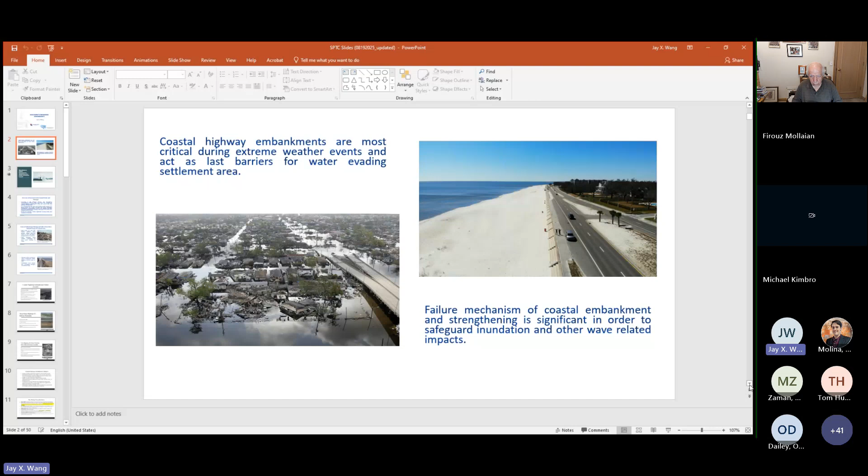Yes, correct. So we have to design a highway embankment against the hydrodynamic forces, erosion, and a lot of things, as we can see here. Wave forces are the first impact to consider when you design an embankment. So how does the highway embankment in coastal areas fail, what is the failure mechanism?

At the very beginning, I'd like to present some cases, and from these cases we can summarize some lessons.

NOAA, everybody familiar with NOAA? We get incomplete data, probably not so incomplete. We recently checked online and found from 1980 to 2018, almost 40 years, there are 233 disaster cases. NOAA has statistics showing a total of 23 weather climate disasters where each case's loss is more than $1 billion per event. We also gathered some FEMA data. Since April 30th, 2018, the total cost for FEMA recorded disaster cases exceeds $1.5 trillion. And since 1978, the total cost is $57 billion for 118 significant flooding events.

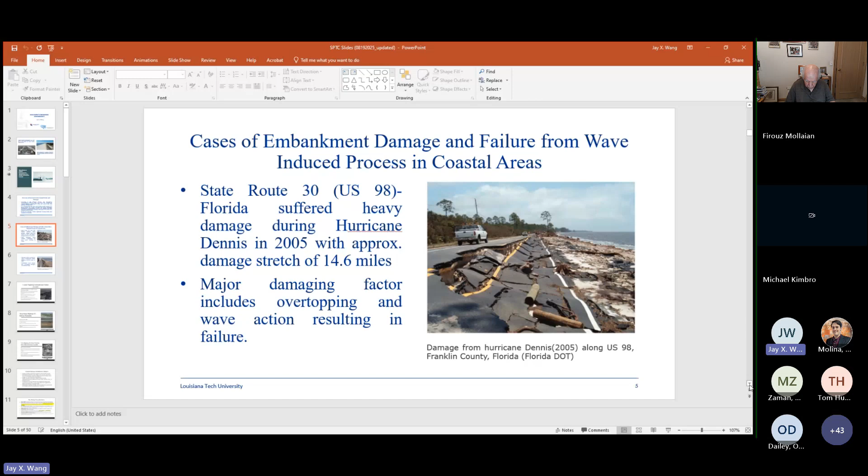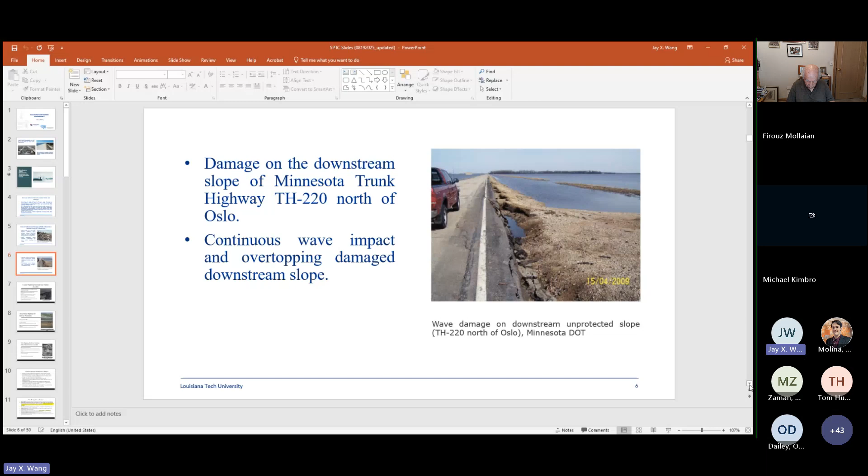Another lesson we can learn is from the Minnesota trunk highway TH220, north of Oslo. Same reason, hurricane came over and wave overtopping happened. But this time it's not upstream damage, we get lots of damage on the downstream slope. So you can see once overtopping happens, downstream gets lots of damage because of erosion. So it happened at the downstream stage.

This is the Louisiana State Highway 82, which was damaged during Tropical Storm Chris in 1982, and Hurricane Chantal and Jerry in 1989. We get a wave impact, we get wave overtopping, and at the toe of the embankment we get soil scouring. So hydrostatic pressure-induced slope stability is another issue we have to pay attention to. The Gulf side lane was destroyed in multiple storms on State Highway 82.

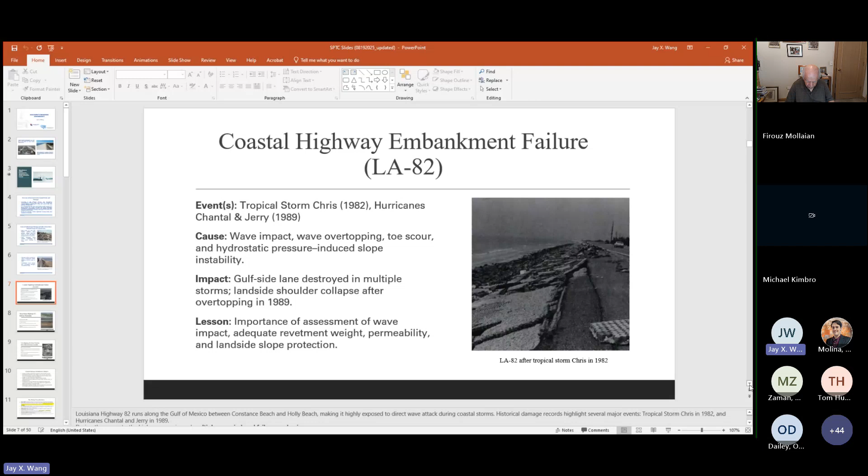So lessons we learned from this highway damage on State Highway 82: the important lesson is wave impact, and we should design and construct adequate revetment weights, and also consider the permeability issue. On the land side we also have to protect the slope. Common sense tells us to pay special attention to the upstream, seaside, but on the land side slope we have to pay attention to how to protect the landside slope.

This is Texas State Highway 87, Bolivar Peninsula, a famous peninsula most of you know. With Hurricane Ike in 2008, a storm surge occurred, and the wave impact eroded the embankment and completely washed away the roadway. This is a very serious disaster. Many sections of this highway were washed away, resulting in long-term closure of the road.

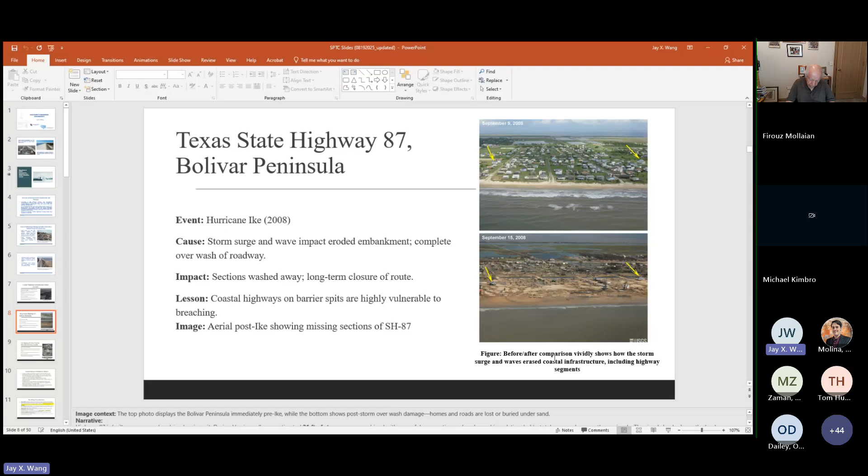What are the lessons we can learn from this disaster? Coastal highways on barrier spits are highly vulnerable to breaching. This is the aerial image you can see. Very similar things we can find from these different disasters.

This is probably the last one I'd like to share. There are thousands of disaster examples like this, but here I just want to draw your attention to how important it is to design the coastal highway. This is the last one: this happened a long time ago, US Highway 90 in Mississippi.

We get more than 20 feet of storm surge combined with powerful breaking wave impacts that also overtopped the seawall. So the seawall is strong, but not strong enough for this. And after going over the seawall, very severe scouring happened. The impact is pavement collapse and disrupting travel lanes on this critical coastal highway.

The lessons we learned are almost the same thing. And here, even with the seawall overtopped, and even though this is a well-armored shoreline, it was still not safe in the end.

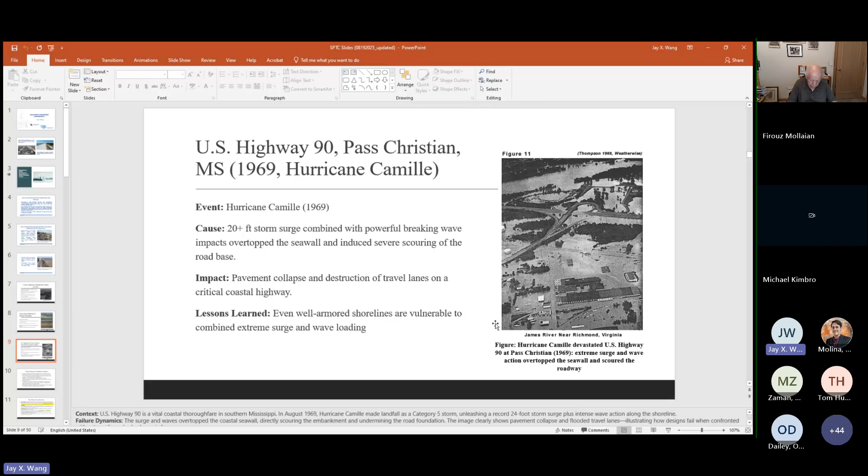From all these lessons, we can see how to design a coastal highway embankment. We have different ways to design a highway, but all these different ways have to pay attention to withstanding wave action, storm surge, and erosion. This is a typical serious problem we have to pay attention to.

The coastal highway is usually built on soft clay, soft beach sand, very loose beach sand. So site investigation and site reconnaissance are also very serious. CPT and SPT site investigations have to be performed to get exact soil data before we do design and construction.

In relation to our research, I have to highlight wave action, sea level rise, and potential erosion. This is a typical serious problem we have to pay special attention to.

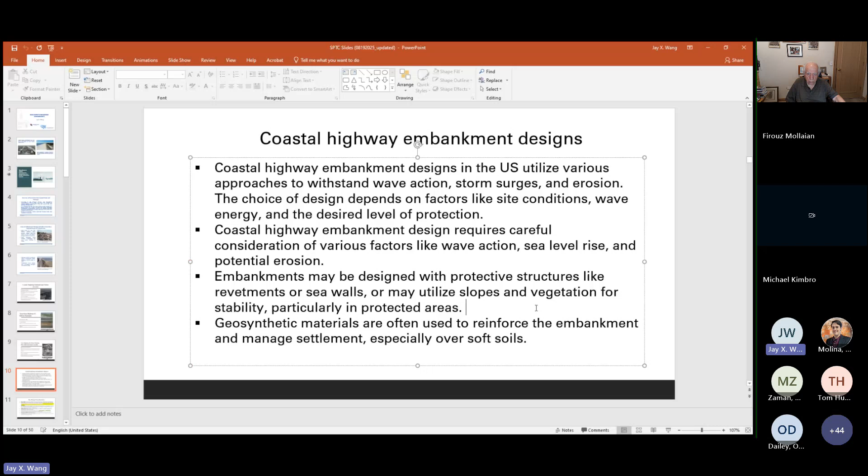When you come to design this highway, these are key considerations when you design the highway in a coastal area. First of all, everybody understands and agrees that slope stability is an issue. We have to build a very safe highway, with the factor of safety going beyond the minimum required factor of safety.

Wave action is the point our research focuses on. Wave action is not only hydrostatic water pressure. If you design any inland highway embankment, you just consider the hydrostatic water pressure. But for the coastal highway, you have to consider hydrodynamic pressure, because tropical storms and hurricanes come over, so everything is not static and should be treated as hydrodynamic.

Another important thing I like to draw attention to, this is my own point, if you disagree that's fine. Sea level rise is a fact, so we cannot ignore it. Sea level rise and storm surge - when we design this embankment highway, the crest level should be getting higher and higher. We have to pay attention to this. Sometimes the traditional design manual we follow is not enough.

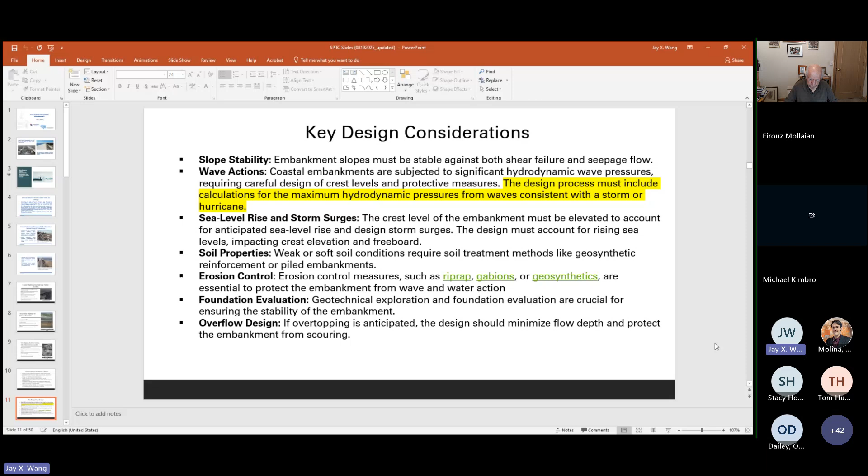Overflow design is related to hydrodynamic force, wave surge, and erosion problems - this is a very serious problem. Now lots of people are doing research, but to be honest with you, as a professor and as an engineer, I don't think so far we've gotten a very well-developed methodology which can be practically used in engineering for highway design. But lots of empirical methods have already been developed and used in engineering practice.

So this is a specific design approach. We have protected embankments and unprotected embankments. For protected embankments, this is a traditional slope on upstream and downstream. And for unprotected, the slope on the seaside and on the backside, the land side, is sort of different. This is just a general thing traditionally used by engineers in engineering practice.

Here I'd like to highlight again the geosynthetic reinforcement. Geosynthetic reinforcement is used everywhere, specifically in highway embankments. This geosynthetic reinforcement can be used to increase the shear strength of the soils, and can also reduce the settlement of the highway. Another very practical use is piled embankment and stone columned embankment - this is very practical for engineers.

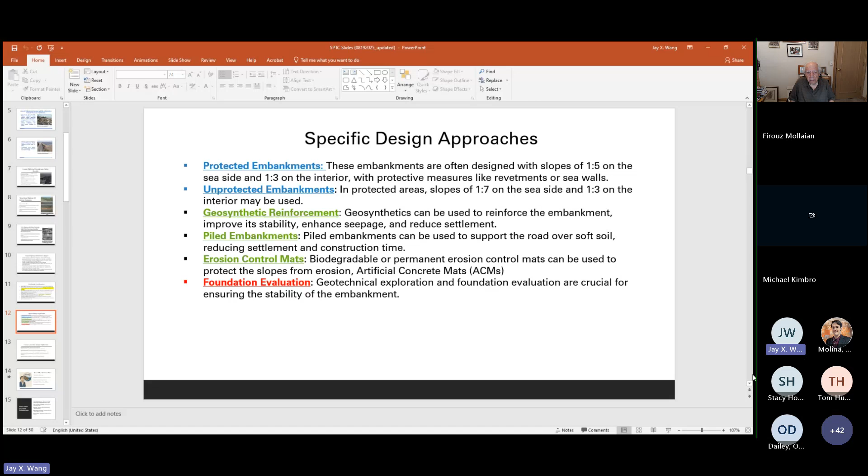Erosion control mats on the seaside - a lot of things. Louisiana CPRA, the Coastal Protection and Restoration Authority, this is a state government agency. They try to use artificial concrete mats put on the seaside to reduce erosion.

So, lessons we learned. First, we have to get accurate wave and surge data - this data is very important. This is the thing we kept in mind at the very beginning before we started working on the SPTC funded research. So we have to get the wave data and the surge data, this is one thing.

We also have to design a highway with adequate freeboard, but without data we cannot say what is the accurate freeboard. So this is based on the wave and surge data from different monitoring stations. Later on I will show you what type of monitoring stations we used the data from.

Landside protection - as I mentioned, we try to protect the upstream, the seaside, but sometimes we pay less attention to the landside, because once the wave surge overtops the embankment, the landside will get eroded and soils on the land side will be washed away. This is a very, very important thing.

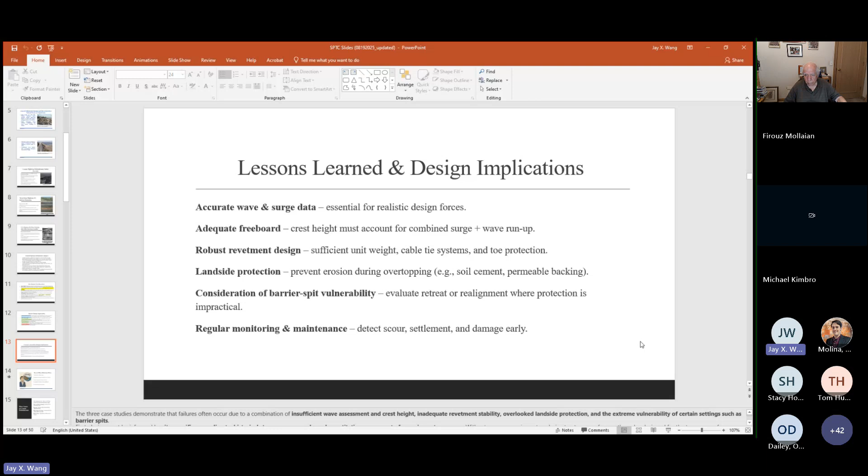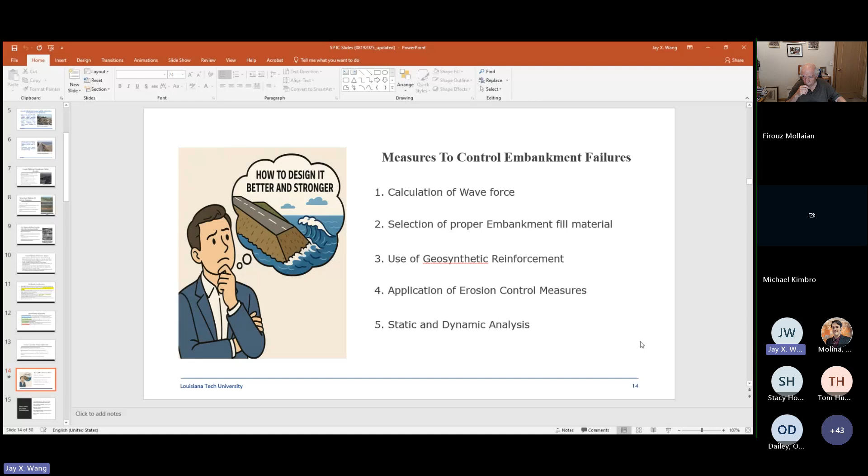So when we come to design the embankment, we go step by step. First, we have to calculate wave forces, not only hydrostatic wave forces. We also have to select the proper embankment fill material, and use geosynthetic reinforcement. We apply erosion control measures, and we cannot only do static analysis, we also do dynamic analysis.

These wave forces - we have to calculate the wave pressure, as I said. Wave run-up and overtopping causes erosion problems, toe scouring, and storm surge and wave action, and cyclic loading. So these are all the factors when we design a highway embankment. This comes down to our research - as a professor and also as a registered engineer, I always remind myself we have to make our research as practical and implementable as possible. So we have to get the hydrodynamic force applied on the embankment, and calculate this dynamic force first on the embankment.

With this hydrodynamic force applied on the embankment, we try to find out what is the worst condition for the embankment. Usually we do hydrostatic analysis and never consider rapid drawdown or rapid falling. But during our research, we found the rapid drawdown case is very important, and in many analyses already finished, this rapid drawdown case is the worst one.

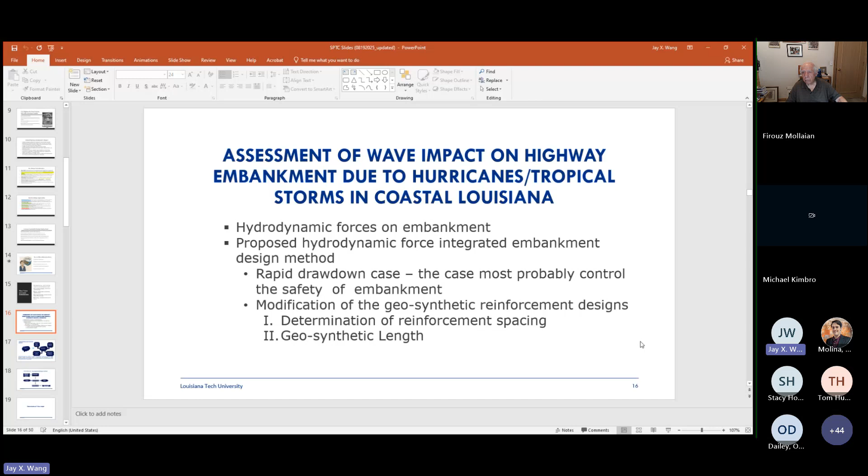This is the second part, the cycle 2 research, but not finished yet. But I'd like to share some information and preliminary research achievements. So here, this is the comparison between conventional design and the modified design method we proposed.

Traditional design of highway embankment, we just do static analysis. We put the highway on the soft soils, the coastal soils, with the gravity, and then we calculate the settlement. We do the slope stability analysis. I think that's it. But for the introduced method we proposed, this is not finished yet.

This is a few steps of research. First, we do significant wave height analysis to calculate the hydrodynamic force. Then we do the very practical, implementable drained and undrained analysis, because this software is already available, like Slope/W and SEEP/W, available for every industry company. With SEEP/W and Slope/W, we find the worst case, and so far we find the rapid drawdown is the worst case.

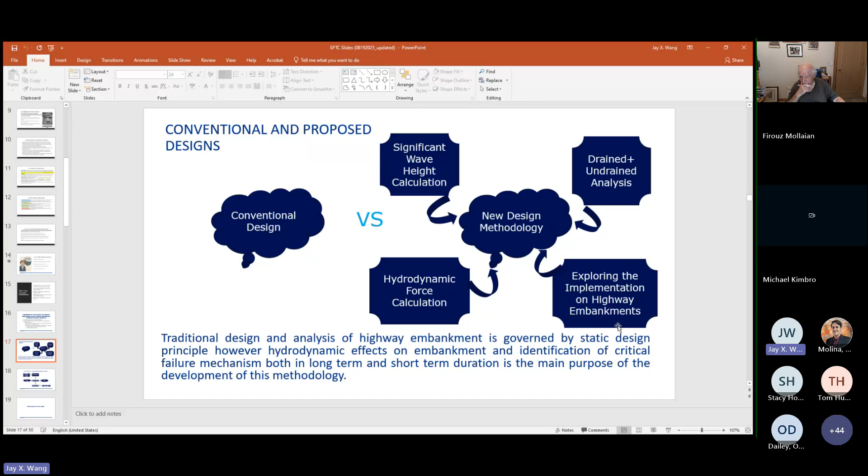And we are trying to find industry partners and how to implement the design method we proposed. So it will be great if colleagues in the audience are interested, we can do collaboration in the future. It will be so great.

For the proposed design method, as we said, we have to find the wave height data first, then do hydrodynamic force calculation, and then we do the modeling. This modeling is not research-based modeling, it's application-based modeling. We use the commercial software to find the worst case for long-term and short-term.

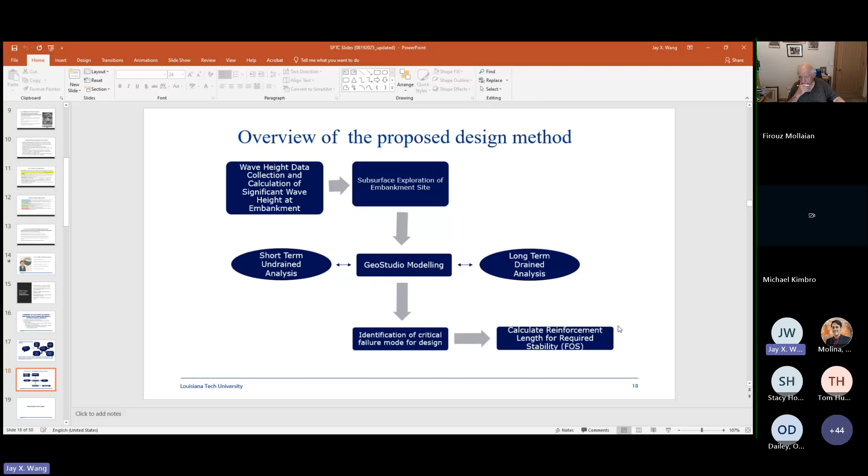And then we do the analysis for reinforcement. We try to find the reinforcement length and spacing. This is for the geosynthetic design part, which is ongoing and we haven't finished yet. So first, the first part of the work is determination of wave height.

Lots of scientists and mathematicians try to use fluid dynamics based numerical models, like the Delft 3D model. They use powerful computers to calculate. This is purely theoretical research. This type of research we did a long time ago, but when you do numerical modeling, you have to be very careful.

At the very beginning, the initial data input and boundary condition data input matter. If we couldn't input the correct results for initial and boundary conditions, every engineer knows we get garbage in, garbage out. So sometimes, because I've been running numerical modeling for more than 30 years, I know what's going on.

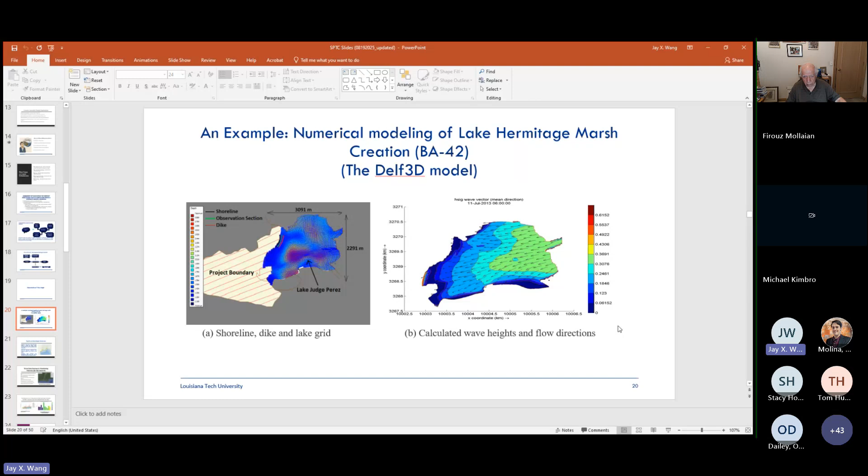And also it's so complicated, I don't think engineers in engineering practice like it. So in this research, we try to avoid any fluid dynamics based finite element analysis. We never did that. We just based on the monitoring station data.

You see the Gulf of America, we have lots of stations. From this screen, we can see the lots of monitoring stations provided by NOAA. And also we have different sources, NOAA, and also different sources of data.

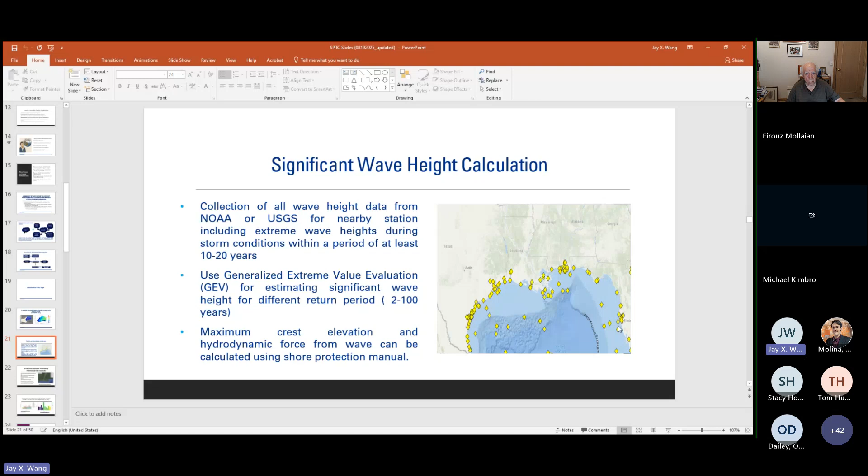But one thing, unfortunately, this data systematically we checked only happens between - this is the systematic data we only get for the last 20 years. We don't have data like for the last 100 years. Some individual hurricanes we get some data, but only 20 years of data available online.

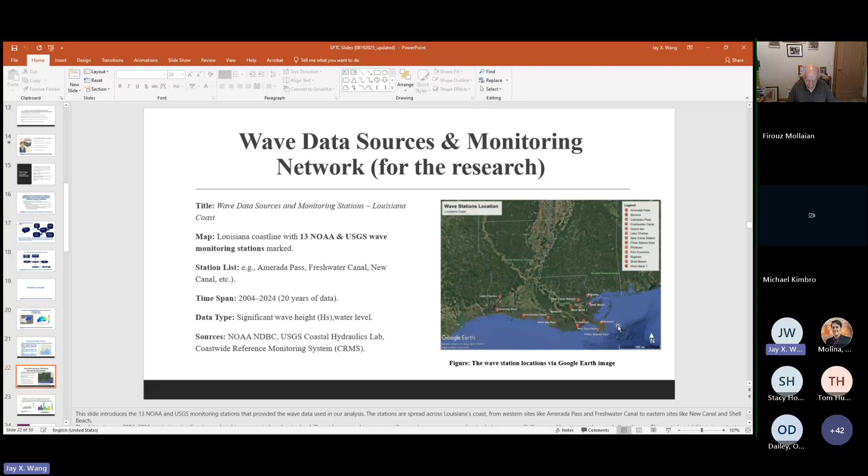Here, this is 13 monitoring stations from NOAA and the USGS wave monitoring station just around the Gulf of America. So we have 13 monitoring stations. From these 13 monitoring stations, we get data spanning from 2004 to 2024, so this is 20-year data. If we got 100 years of data, that would be fantastic.

This data we analyzed using some statistical tools, the GEV model, a generalized extreme value analysis model. So we do some statistical analysis, and then we analyze the wave height for different return periods, say 5-year, 10-year and 20-year return periods, because we have only 20 years of wave data.

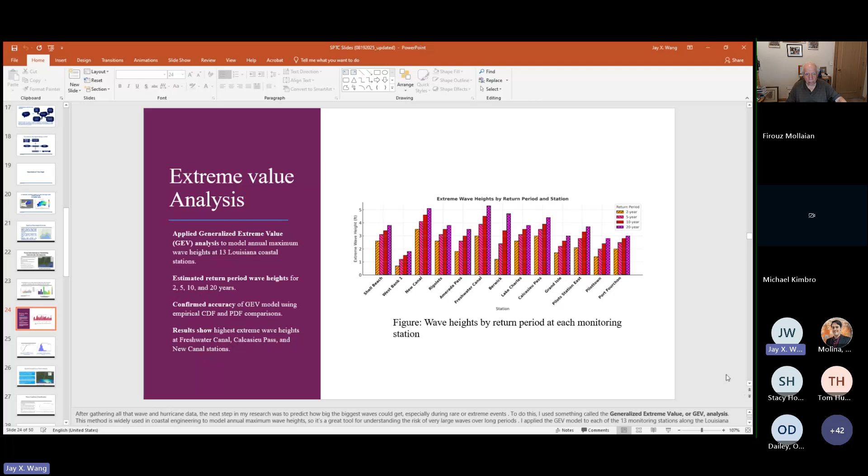So now we just got the data for 2-year, 5-year, 10-year, and 20-year return periods. And also we confirmed this GEV model and the empirical model. So this is statistic analysis, I think, reliable from the two figures we plotted. The statistic analysis is not so hard, but I'll skip the details of it.

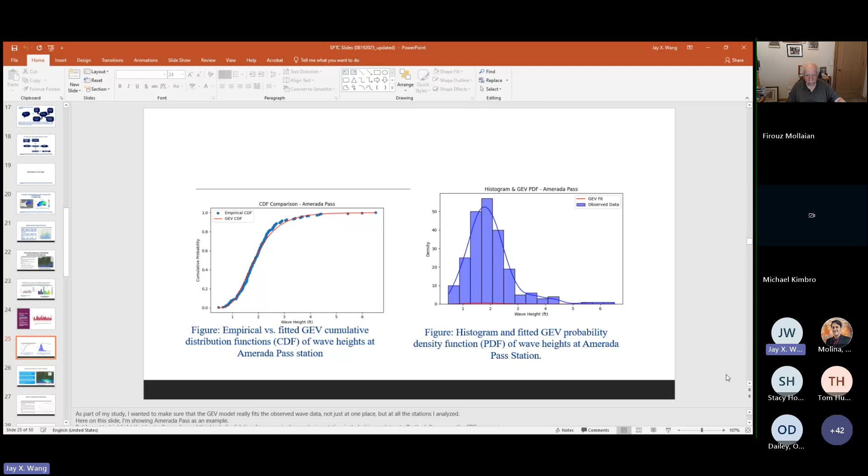This slide shows the data analysis confirming the GEV model is reliable, from 13 monitoring stations scattered along the coast of the Gulf of America. But for some areas, we don't have monitoring stations, so we try to find how to interpolate these wave heights. We got another software called the ordinary Kriging method, a statistic-based model that can do spatial interpolation, so for any area with no monitoring station available, we still can get the wave height data.

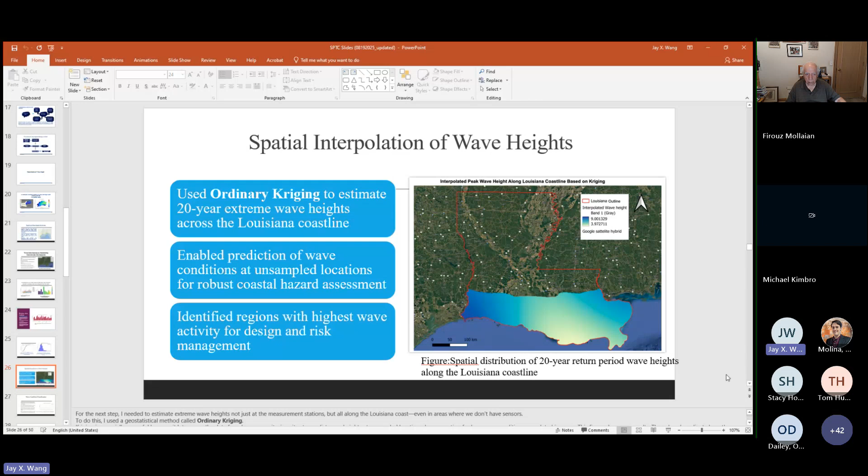So I want to draw attention again for the audience: all this analysis, all this wave height data, is not numerical modeling data, just from monitoring stations. So this is the real data, the real high wave height data. And also we did some critical conditions analysis.

Everybody knows if you work with coastal highway embankment design, we have two types of wave: breaking wave or non-breaking wave. Here you see at the 13 monitoring stations, almost everywhere the wave is a breaking wave. The breaking waves are the most risky condition compared with non-breaking waves.

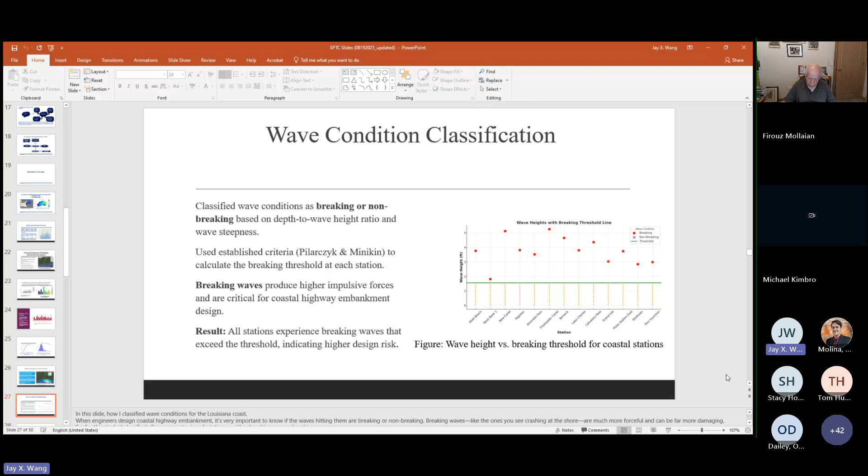In engineering practice, whether using the U.S. Army based method or other methods, we have lots of empirical methods. In Cycle 1, SPTC sponsored the Cycle 1 research, and we compared multiple equations and their outcomes from different empirical equations. We found two typical methods give very conservative results: Minikin and Blackmore-Hewson. As an engineer, I say we try to find the most conservative wave heights to do the analysis.

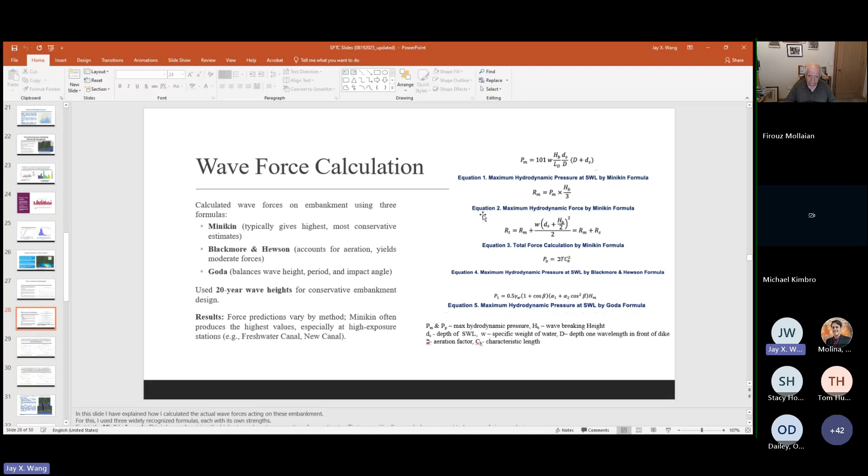We pick two spots in Louisiana: one on the east side is the New Canal station, the other is close to Lake Charles. The station was close to Lake Charles.

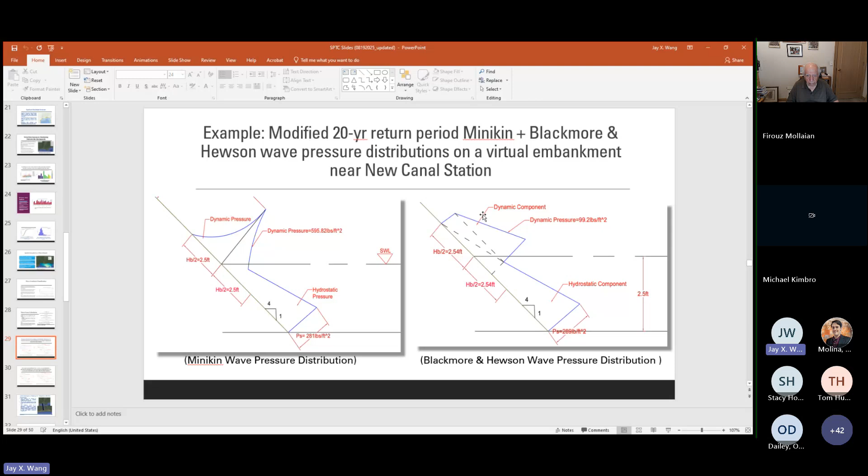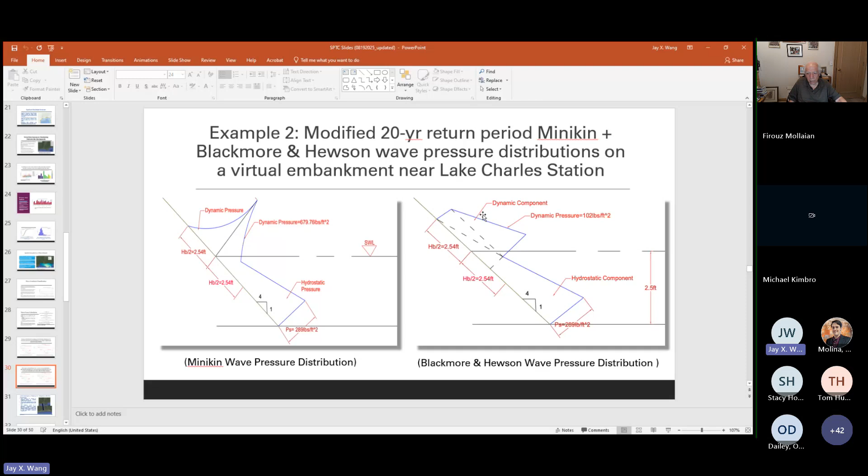This is a calculation following two different empirical methods, the hydrodynamic force we calculate, and the pressure distribution on the embankment. This embankment is a virtual embankment close to New Orleans, near the New Canal Station, and the other virtual embankment is near Lake Charles. We selected the 20-year return period wave, hurricane or storm, and used the Minikin plus Blackmore-Hewson wave pressure distribution method to calculate the wave distribution.

So this is the first part of our research goal. Here is an example: at the very beginning we mentioned Highway 82, Louisiana State Highway 82, which got real damage previously. So we try to use this developed methodology to analyze or design State Highway 82.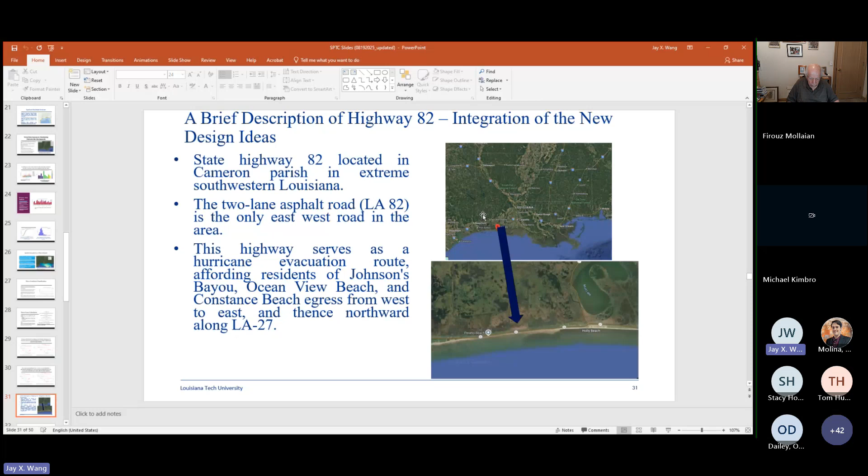State Highway 82 is in southwest Louisiana in Cameron Parish. This is a 2-lane asphalt road, the only east-west road in the area, so it's very critical and important for hurricane evacuation since this is the only roadway we can use. This is critical and important, but previously it was severely damaged, so how do we implement the new design methodology?

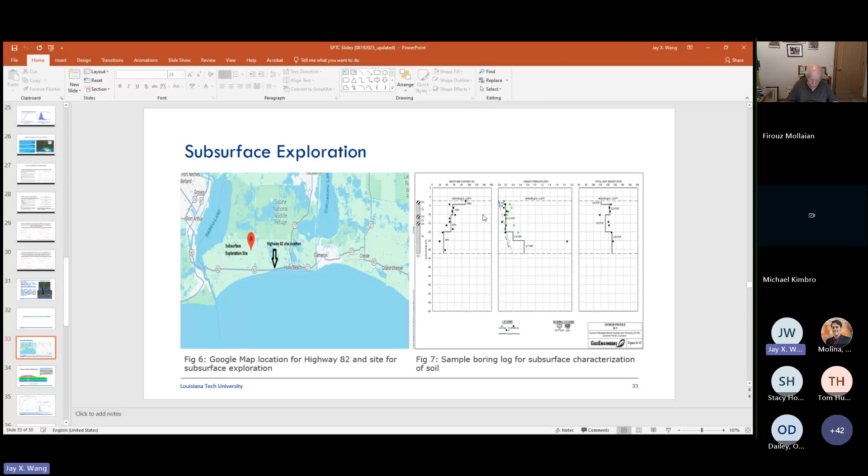This is what I'd like to say a little bit more about. You see this is the road of Highway 82, and on the right, this is the SPT soil profile we got. We have moisture content on the left, in the middle this is the undrained shear strength, and on the right-hand side this is total unit weight.

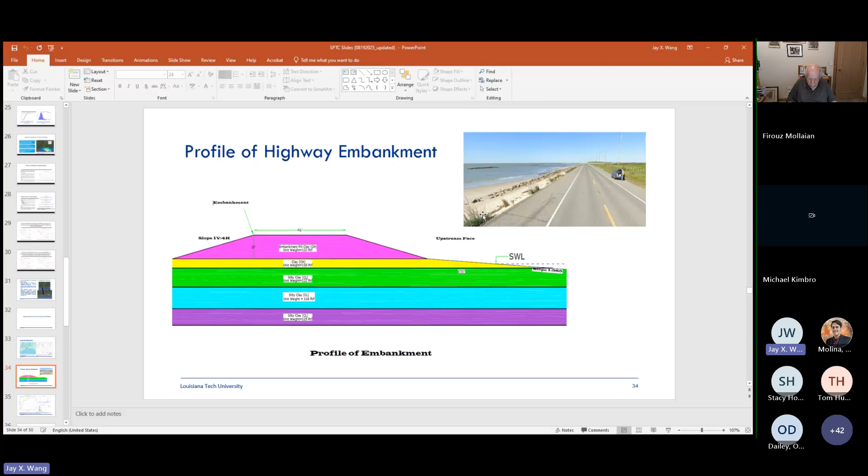This is the soil profile of the highway, Louisiana State Highway 82. From this profile, we can see the embankment is clay soil, clay filling. Right below the embankment fill, we get soft clay, a silty clay, everywhere. Everything is so soft, so we have to pay attention.

This highway is in extreme southwest Louisiana, so we find the extreme wave height following the method I just mentioned. We do the statistical analysis and find the wave height for return periods of 2, 5, 15, 25, 50, and 100 years.

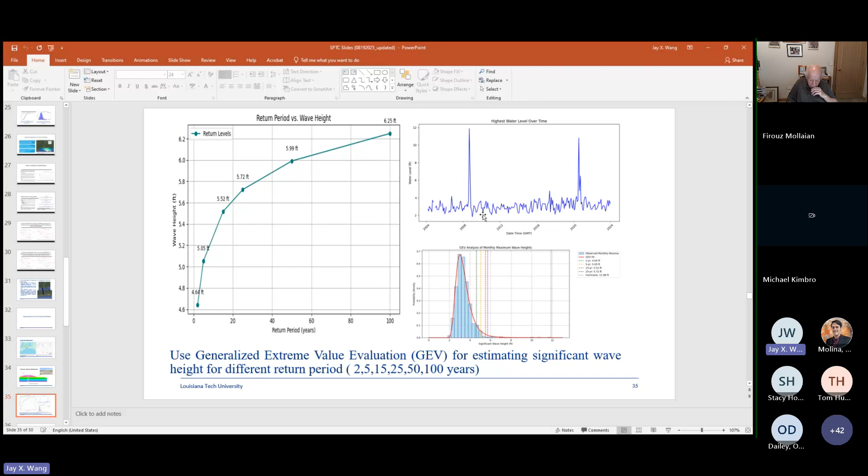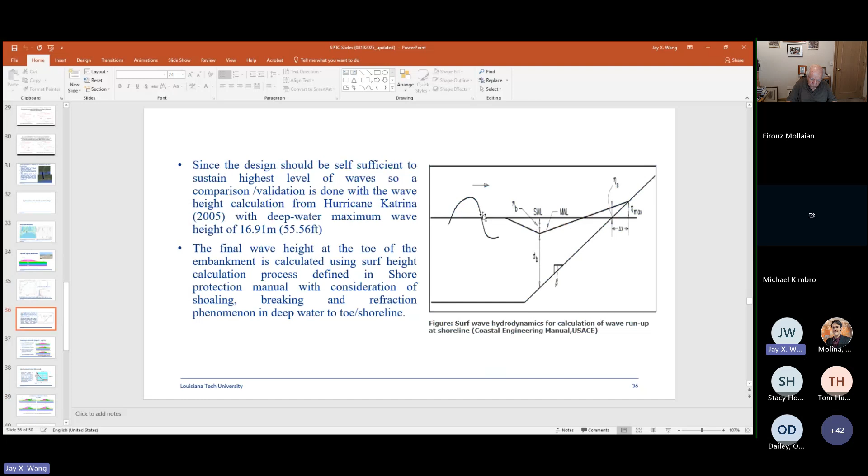For 50 and 100 years, as I mentioned, we don't have lots of data, so this 50, 100 year data is probably not so reliable. We follow the U.S. Army Corps of Engineers method to calculate the hydrodynamic pressure.

In the proposed method, we have to do long-term stability analysis. For the conventional method, we just do static analysis for drained condition. But we already calculate the hydrodynamic loading, so once we analyze the slope stability, we do hydrodynamic loading analysis and find the critical factor of safety.

This is a very important finding from the research for cycle 2: the short-term stability, rapid drawdown, is a critical condition. This is an undrained analysis, and we have to pay special attention.

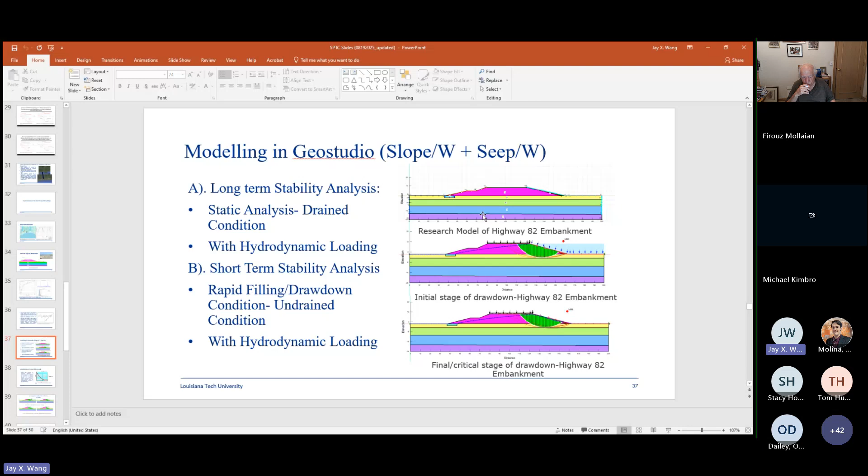From here I just showed some typical results. The factor of safety is very critical. This is a more concrete result for the rapid drawdown methodology, and it's a critical case for the undrained analysis.

At the very beginning, if a hurricane comes up, the sea level rises, and then as the hurricane recedes, the sea level draws down. During this 2-day or 3-day rapid drawdown, the factor of safety on the highway embankment keeps decreasing. You see here, this is the typical graph we can see.

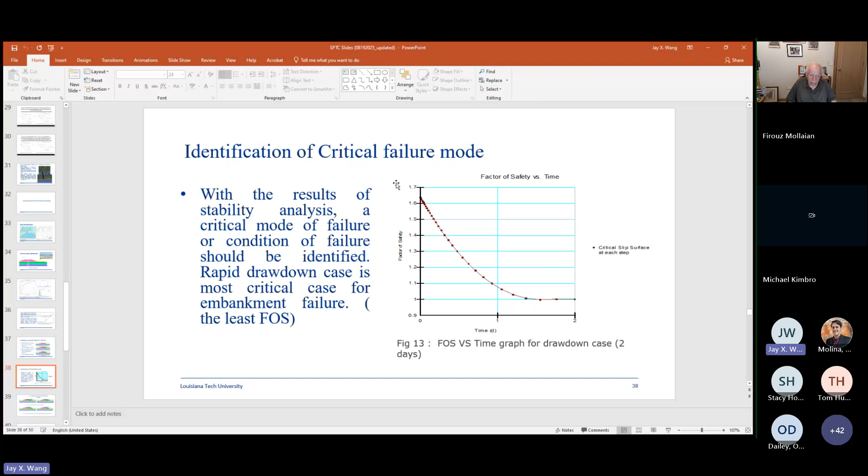So for the hydrostatic condition, typically it's not the controlling or critical condition, but the rapid drawdown is a critical condition. Here we compare two methods.

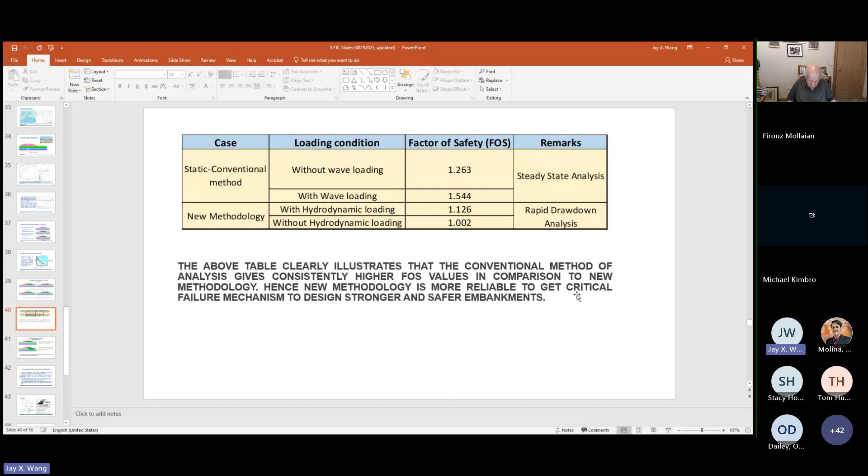This table shows that if we follow the conventional method for the regular wave loading condition without wave, just the sea level water pressure, we get 1.26. But with wave loading, it's 1.5. If we apply the new method using hydrodynamic force and also do seepage analysis, and pick up the rapid drawdown case, the factor of safety comes down to almost the critical point, 1.0.

This is a very important thing. For the conventional method, we can only use one layer of geosynthetic material, and we can guarantee the highway embankment with a factor of safety of 1.6, greater than the required minimum of 1.5.

But if we adopt the new method and apply hydrodynamic force, we have to use 7 layers of the same geogrid reinforcement to guarantee the factor of safety is 1.5. So you see, this is a big difference between the conventional method and the new method.

Geosynthetic method, or my colleagues, the audience, I think you guys are familiar with that.

We follow the traditional way. This is the FHWA adopted design manual. We pick up spacing, we calculate the spacing for different embankment heights, and we also find the critical length for each piece of geosynthetic material at different elevations. So we have 2 steps. Step A, we find the spacing - this is the traditional way to find the spacing.

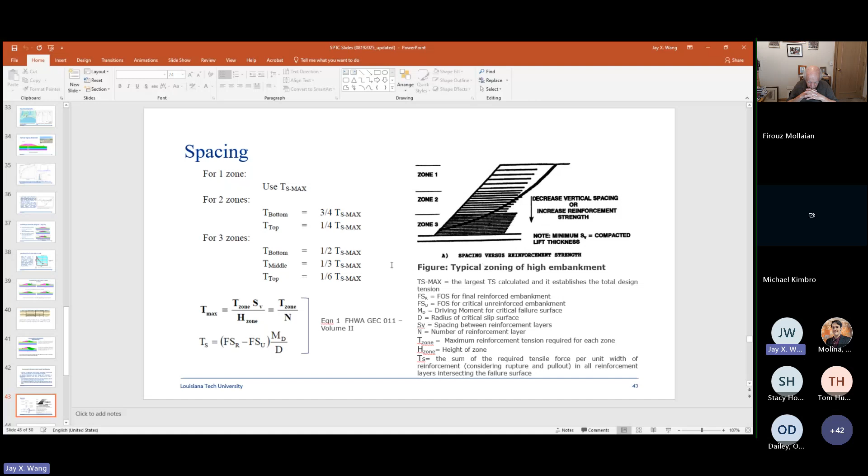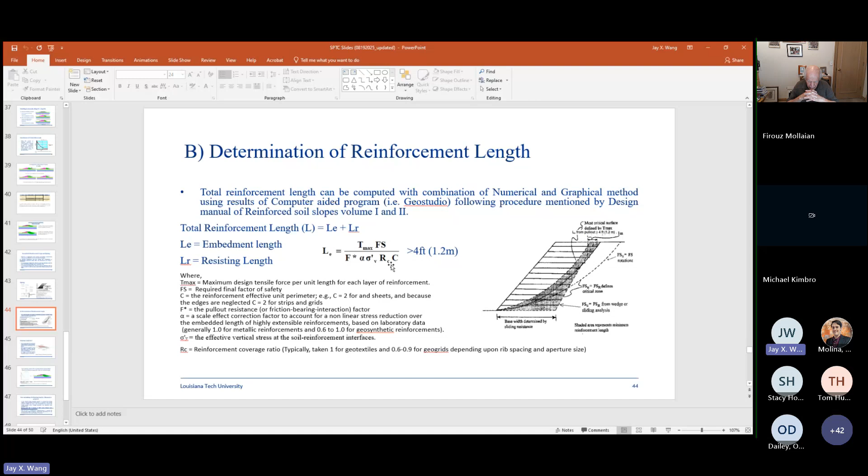If you follow the FHWA adopted design manual, this is the method, the design calculations. Step B, step 2, we have to determine the reinforcement length. The reinforcement length has 2 parts: embedment length and resisting length. And now the research is underway.

We try to integrate the new methodology, the new idea, as I mentioned at the very beginning. We have to consider hydrodynamic force, and also we use Seep/W plus Slope/W to identify the critical case to determine the resisting length. So once this part of the research is done, we can propose a systematic method for coastal highway design.

An implementable coastal highway, a reinforced coastal highway embankment design methodology. Hopefully this method will come up complete very soon. But this part of research is incomplete, so I just want to present some partial results.

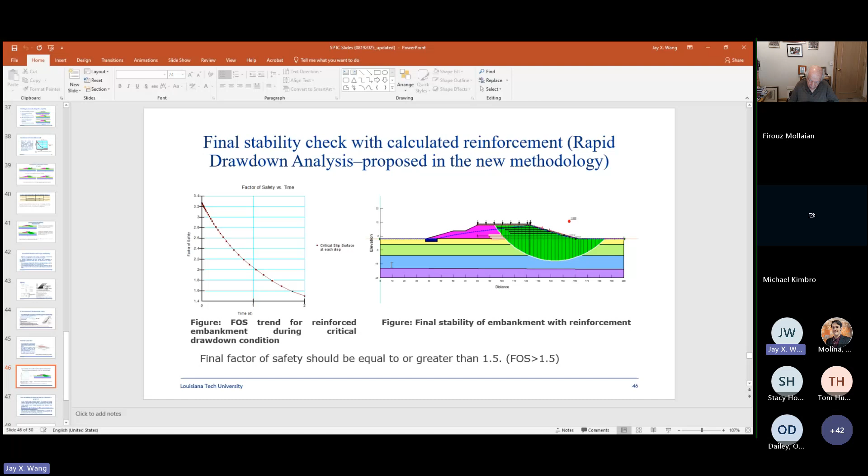This is another incomplete result I'd like to present. Following the new methodology, we can say the critical case for Highway 82, Louisiana State Highway 82, is after hurricane receding - the rapid drawdown situation is the most critical. Based on this critical case, we try to find the spacing and the length.

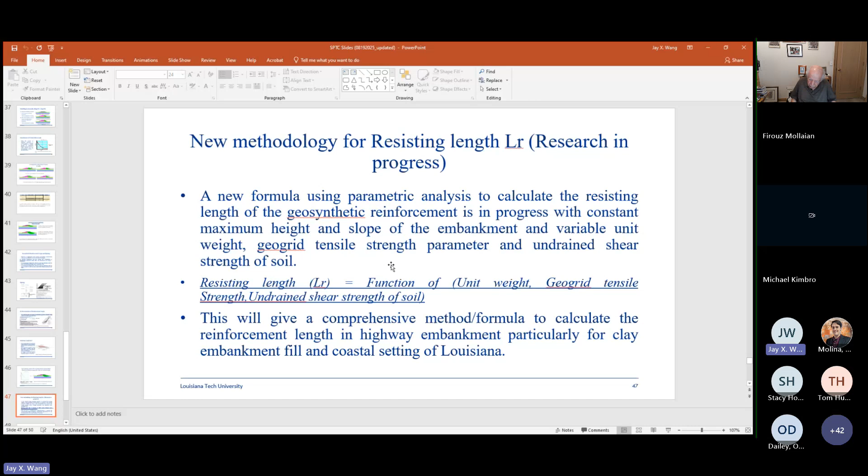This is some idea I'd like to share. We have tried to use parametric analysis to find out the resisting length of geosynthetic, geogrid, or geotextile. We will integrate some new ideas to find the resisting length. This is part of the second part of the entire length of geosynthetics.

So I'd like to make a summary. This presentation presented results and achievements which we think are very practical, implementable, and feasible for engineering design, specifically designing a coastal highway. For this coastal highway, we cannot simply follow the traditional method of doing a hydrostatic analysis and then determining the height and slope stability analysis. We have to use the new methodology.

First step is to find the wave height. So how do we find the wave height? We don't follow the scientist or mathematician recommended method, like doing Delft3D analysis or other very theoretical fluid dynamics based numerical modeling or finite element modeling methods.

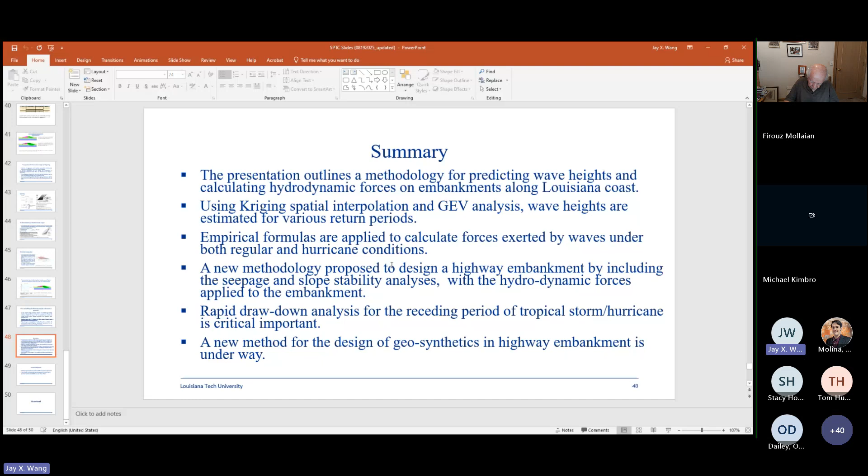As I mentioned, the new method is undergoing, is under investigation. We don't have a complete result yet.

This is the last thing, not the least thing, I'd like to appreciate. So far, the research achievements I presented here were funded by this research project funded by SPTC. Without the funding opportunity provided by SPTC, we cannot carry out this research. Another thing I'd like to appreciate is my graduate students, Abhishek and Uday. These two gentlemen worked so hard to implement the research ideas we have.

So here, this is my presentation. So I don't know here.

There are questions from the audience. I'd like to take this chance to apologize again. At the very beginning, we got sort of messed up because at Louisiana Tech, we always use the Zoom meeting tool, so I'm not familiar with the Microsoft tool.

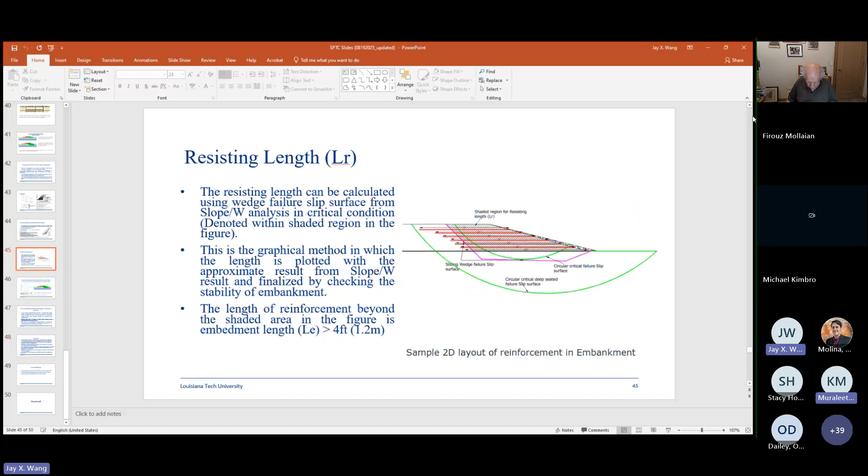Yeah, that's it. Yeah, this is things we discussed. We will try to, I discussed with graduate students. This is slide 40, is right? Yeah, slide 40. Yeah. Okay, yeah, we noticed this problem.

I checked with my graduate students for this case, and we said if the sea level is rising, then I let my graduate students check the factor of safety for both, say the potential slip surface is on the seaside, and also I like to check if the potential slip surface goes from seaside to land side. And because this highway embankment is very wide, they said still the seaside factor of safety is the controlling point.

So if you get sea level rising on the seaside, this water pressure, water force will push against the landslide happening for this potential slip surface. So the potential slip surface from the seaside to land side is not the controlling condition.